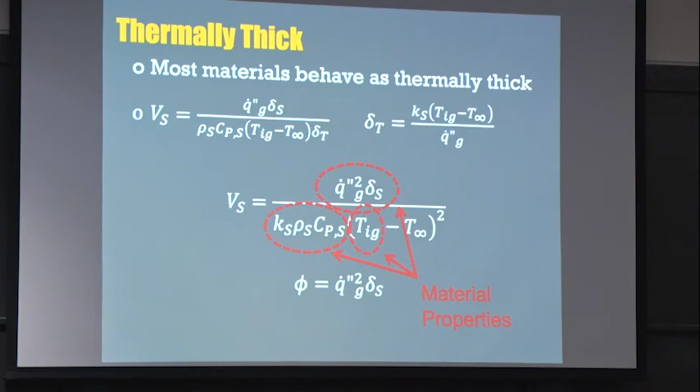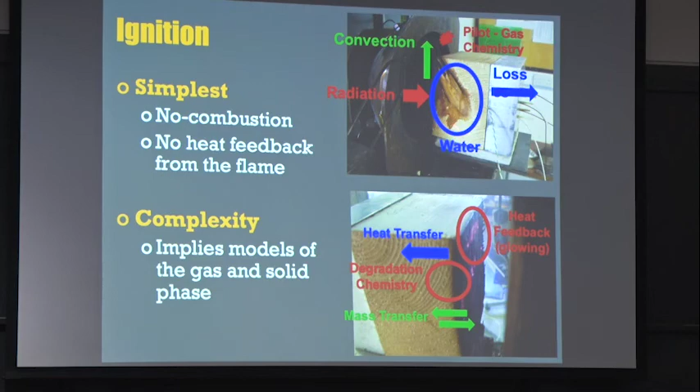So we're facing a problem of endless complexity. So here's a piece of wood, and the piece of wood is being heated by radiation. You're going to have convection, your film coefficient. You're going to have heat losses in the back. You're going to have water migrating. Normally the materials are heterogeneous, so you're going to have water concentration, for example, around the eye of the wood.

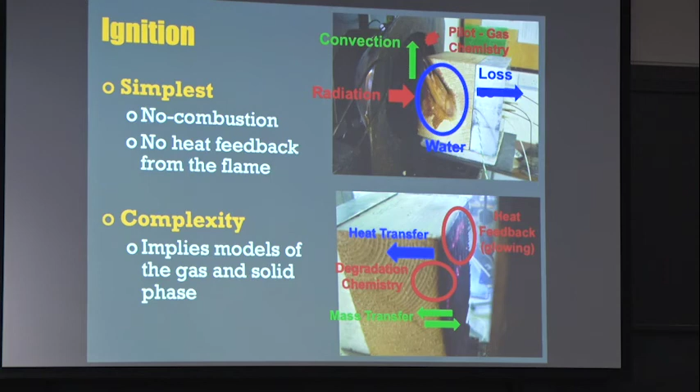And you're going to have different heat transfer and different mass transfer if you're against the grain or with the grain. You're going to have different chemical processes like glowing, for example, which is smoldering, and which is a solid phase combustion. So the problem in itself is incredibly complicated. And once again, we need to take a step back and start looking at this problem in a much more simplified manner. But we have to keep in mind exactly what we are assessing, so we cannot get lost in trying to figure out something that effectively becomes irrelevant.

So many times one of the problems that we tend to have with very complex problems is that we know what we can solve mathematically. And what we do is we transform the problem to fit the math as opposed to actually create a math to solve a problem. And that way we end up solving problems that are not existent, just simply because we can actually solve the math. Now, it looks very pretty in a paper, but it's absolutely and utterly useless because you're solving a problem that is unreal. And this is one of those situations where you actually have an enormous risk of landing in that path. And we have to be extremely careful.

Perfect example, one of my former associates, who is a professor now in Imperial, developed this model of pyrolysis within the solid. And they were trying to predict how the material was going to gasify, but because they couldn't get a proper reduced chemical kinetic mechanism, the way they actually do it is by using genetic algorithms. In other words, they were fitting in a very sophisticated way the data. So they started with one chemical reaction, they moved to 2, they went to 3, 4, 5, and they kept increasing the number of reactions, many parameters being involved. But of course, the genetic algorithms will always find you a number.

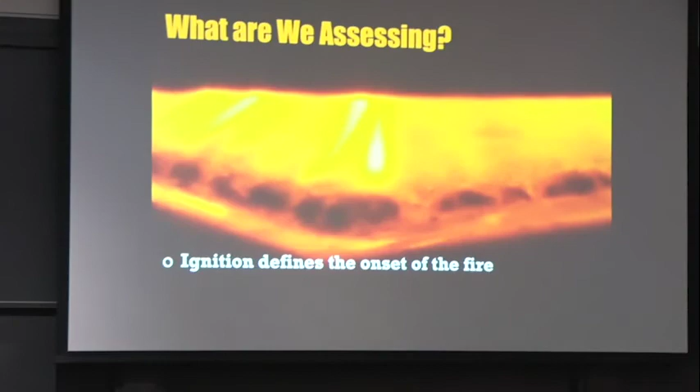Ignition is going to define the onset of the fire, and that's what we're interested in. We want to know when the fire starts. Now, the path that it follows is going to be very complex, and we have to be able to simplify it in a way that we can actually achieve the objective. So ignition is going to control flame spread, and therefore is going to control fire growth in the system. So we need to be careful.

Now, if we look at the problem in its complexity, that's the way it looks. So effectively, if I take a piece of wood and I start heating it up, it's going to start degrading, it's going to crack. So you're going to have an area of cracks. Basically, you're going to have areas where the material is going to be consumed, and you're going to get a porous environment being formed. So you have all those holes in here.

So the charring region, or this area that is degraded, is going to progress with a certain velocity. And that velocity is going to be preceded by a pyrolysis front, because there are multiple reactions that can actually happen in here. And there's going to be a thermal front that is going to be here, and there could also be an evaporation front at some point.

At the same time, oxygen can actually diffuse to the inside of the material, while fuel can actually migrate to the outside of the material. And in the process, they can react, and you can actually have oxidative reactions like glowing, for example. So you can have all sorts of things going on. You're going to have re-radiation coming out. So you can complicate this problem as much as you want.

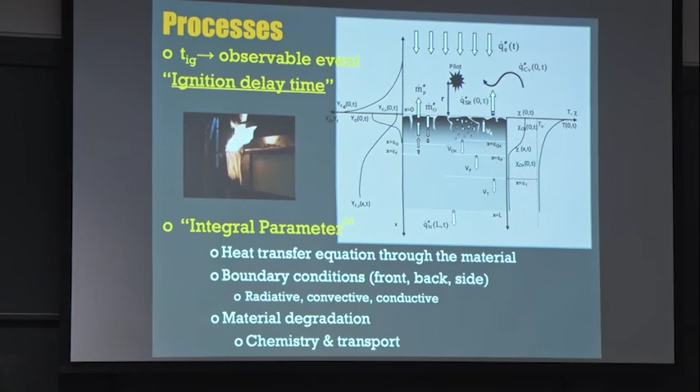Now, why the ignition delay time? It says it there. It's an observable event. So the magic of the ignition delay time is that if I start the process impulsively, in other words, I put a cold material in front of a radiant panel, I know when time equals 0. And then I can wait until all these processes happen, of which I cannot see any of them. I cannot measure any of them.

We don't have appropriate diagnostics to be able to actually measure, for example, the migration of fuel within a porous media. We cannot do that. None of these events are observable. But the one thing that I do know is that at some point it will ignite. And the ignition is something that I can see. So I can establish time 0, I can establish time to ignition, which effectively gives me an observable parameter, something that I can measure.

So the next thing is to try to create an equation that describes that observable parameter. So then by comparing my equation that calculates the ignition delay time with my measured ignition delay time, I can extract some of the parameters that I cannot measure. So in a way, what you're doing is an inverse model. You're taking something you can measure, and you are comparing it to an analytical formulation so that you can extract the parameters that you need.

So the simplest possible formulation that I can have is a one-dimensional heat transfer equation. So how do I get into a heat transfer equation that is one-dimensional? I'm going to make my sample big enough. I'm going to insulate it well enough so that at least in the observable area, I know I don't have gradients of temperatures in Y and Z, and I only have gradients of temperatures in X. So I'm creating an experiment that fits the model that is the most simple.

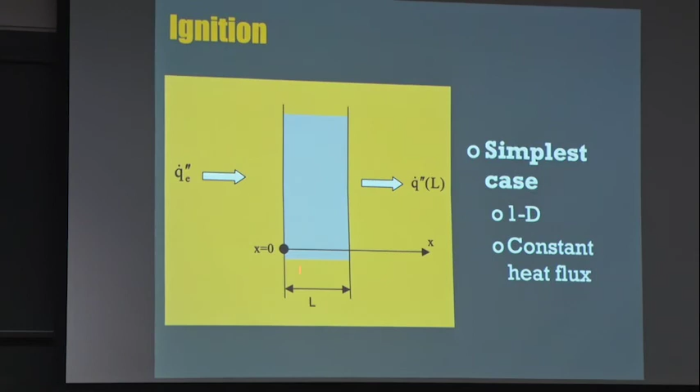Okay? So basically, I am going to try to make it as one-dimensional as possible with x equals 0 at the surface that is being heated and x equals L at the back surface. Now, to simplify the problem, I am not going to vary the heat flux. What I'm going to do is put a radiant panel with a well-characterized heat flux in front of it so that I'm putting a constant supply of heat into the system.

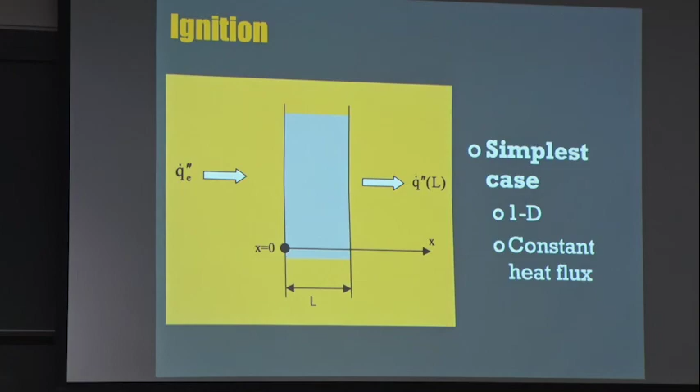At x equals 0, the heated surface, conduction into the solid at x equals 0 plus is equal to the energy absorbed by radiation minus the heat conducted back to the gas phase minus the surface re-radiation. Is that okay? So this is what is lost by re-radiation, this is what is absorbed, this is what is conducted. Okay? Now, I haven't put a convective heat transfer coefficient. I could actually put a convective heat transfer coefficient, but basically I'm doing conduction back through the gas phase at this point.

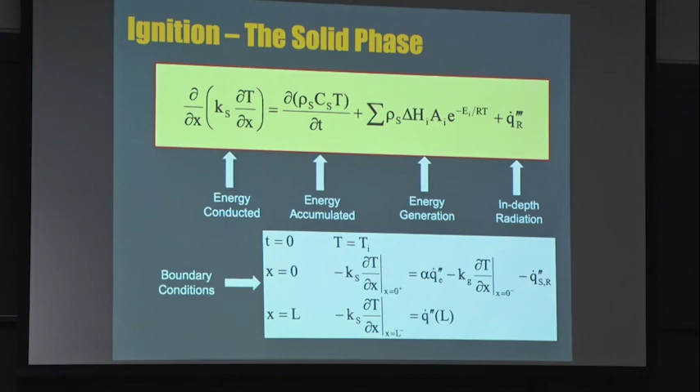So a heat sink, if you put a big block of aluminum in the back, by measuring the temperature of the aluminum, you can actually quantify the heat losses. Okay? Either way, it's the same, but effectively you're creating an experiment that is minimizing your error. Okay? So there you go. Now, the big problem is the fuel generation, because to be able to ignite, I need to produce fuel. So the key parameter that I want to obtain is the amount of fuel that is being generated. So the amount of fuel that is being generated is going to be given by this expression. Now, what does this expression mean?

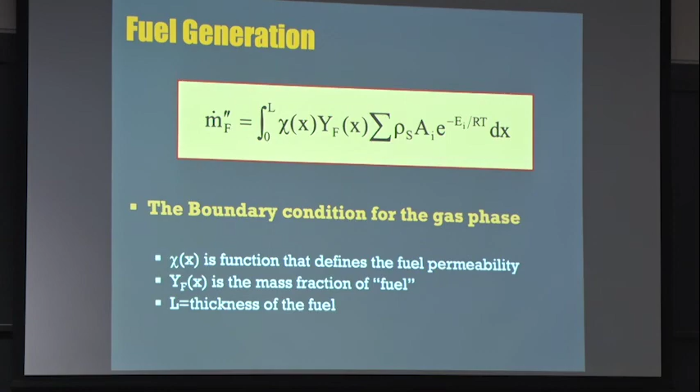So you're saying that if this is my solid, okay, and I have a gradient of temperature, I'm not going to assume ahead of time that I have a high activation energy. Okay? What I'm going to assume is that effectively you can produce fuel at every level because the reaction rate is some e to the minus E over RT. Okay? Okay, so if I have a reaction rate, then effectively it's a continuous function. So wherever I am, I will produce mass.

Okay? Now, obviously, if I have a very, very high activation energy, most of the mass will be concentrated at the surface. But if the activation energy is slightly lower, then effectively I'm going to produce mass in depth. Now, then if you look at what comes next, then you have this concentration, because effectively these reactions might not produce only fuel. Part of the fuel might be oxidized because you have diffusion going inside.

Okay? So this will be 100%, or a mass fraction of 1. Okay? So this is the amount of mass that is being produced by the chemical reaction. Part of it might be already fully oxidized. So if I have diffusion of oxygen coming in, not everything that comes out can be fuel. Part of it can actually be already CO2, for example, in which case it will not contribute to your ignition. It will be an inert. So effectively, only a fraction goes out, and that fraction is YF.

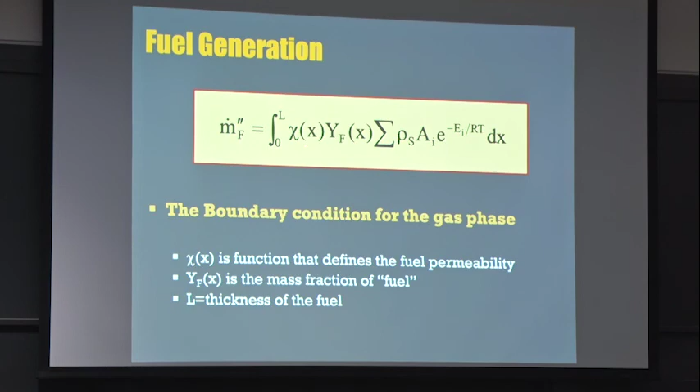So you have some other permeability or whatever function that reduces even further the amount of fuel that can come out. Is that okay? So at the end, the fuel that comes out is what is being generated, what is not oxidized, and what is not trapped. Is that clear? Okay? So the equation then becomes quite complicated because now you have all these different terms. And the problem is that I need to integrate over the entire depth of the material. This is the fraction that is not trapped. This is the fraction that is not oxidized, and these are all the chemical reactions that are producing the fuel.

Okay? And this is where you start getting lost. Because there's no way you can measure this properly. You could measure it at the outside, okay? But then a lot of things might have happened in between, but maybe this one can be quantified. This one is almost impossible to measure, and the chemical kinetics, eventually the sensitivity, the compensation, whatever, it can create a very, very significant problem, okay? So here we are now getting to the point where this becomes an intractable problem, no matter how simple we've tried to make it.

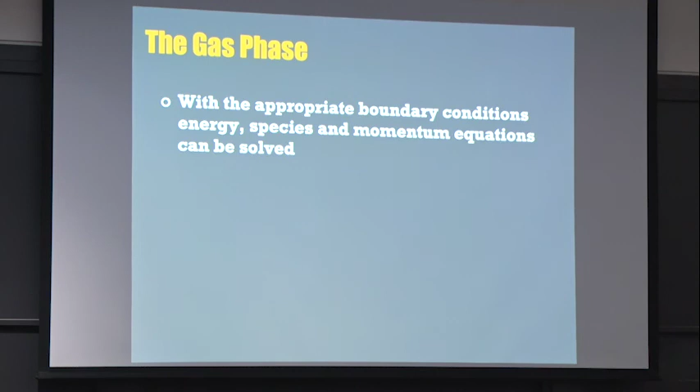So with the appropriate boundary conditions, I can try to solve this. And this is what people have been trying in these pyrolysis models. So when you look at ThermaKin, you look at Gpyro, all these pyrolysis models, what they're doing is effectively solving these equations here with these source terms. Is that okay? And they keep playing around with different forms of kinetics, different forms of oxidation, different potential permeabilities to try to find as close as possible a mass flux being generated by the fuel.

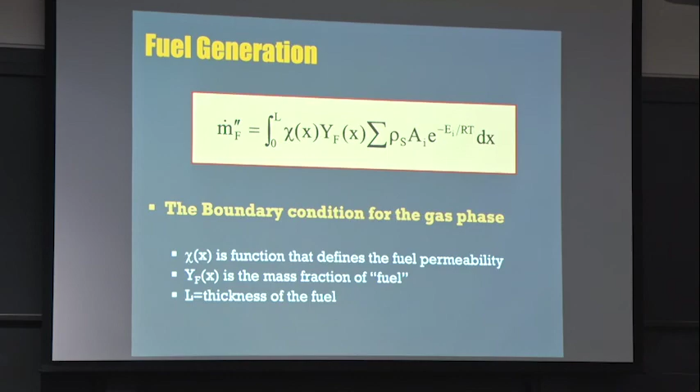Okay? Now, the two main codes right now are ThermaKin, that is Stoliarov in Maryland, and Gpyro, which is Lautenberger in California. So once again, East Coast versus West Coast. And so the two models are fundamentally identical, with the exception of a few nuances that are more the product of the perception that the researchers have. But effectively, they are desperately trying to create a mechanism to solve those equations. And then eventually, they're trying to bring fuel to the gas phase to try to create a combustion process.

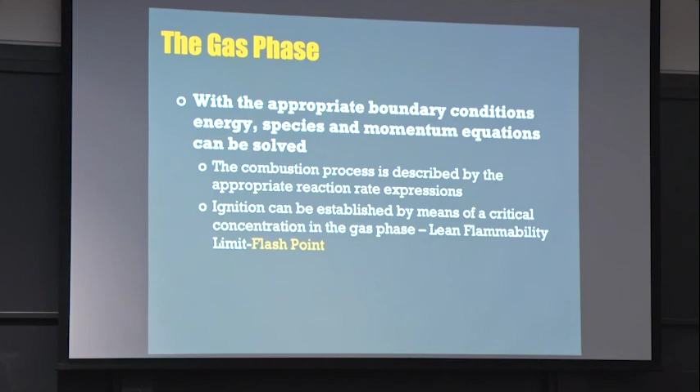And for example, a simplified version of Gpyro was introduced by Simo Hostikka in FDS. So the CFD model now, once you get the fuel coming out, it feeds a combustion reaction, which is really not a combustion reaction, but is purely a mixture fraction reaction where you don't have combustion, you just have mixing. Is that okay? And eventually ignition can be established by means of some sort of critical parameter. Now, this is important, because here there's a big confusion between the flash point and the fire point.

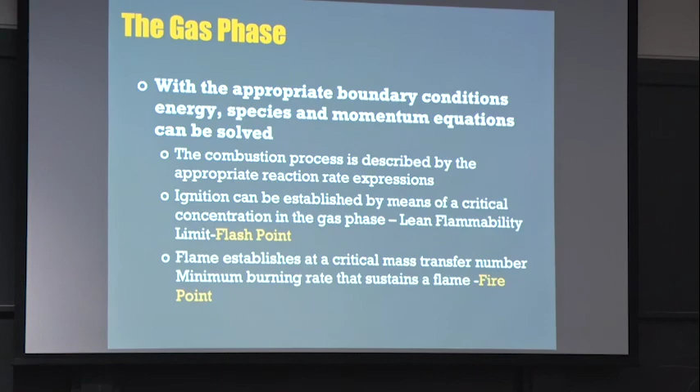Okay? So, can anybody explain to me what is the difference between the fire point and the flash point? I mean, the definitions are there, but what is conceptually the difference? Yeah. Difference between a local energy balance and a global energy balance. So your local energy balance would be when you have ignition, which would be your flash point, and then your fire point is when you can actually sustain a fire that moves throughout space. You are fundamentally right, okay? But it doesn't help explaining what the problem is.

You were going to say something? Yeah, but I think he said that one of them was a sustained flame and the other one was just there for a short while. Okay, so that's a physical manifestation. Yeah. So the flash point is a flash, and it cannot stay. That's associated to a global energy balance because effectively it cannot produce enough fuel so that the flame can remain in place.

Is that okay? So in a way, the fire point, yes, is you have attained a certain global condition that enables the flame to sustain and remain established. Okay? Now that's a manifestation. While in the case of the flash, you have not attained that global energy balance, but nevertheless you're within the flammability limits. So if you ignite, you can flash. There will be a flame, but that flame cannot maintain itself, because the global energy balance is not appropriate.

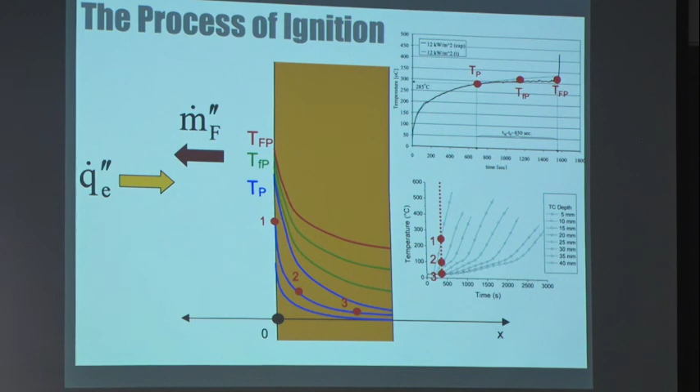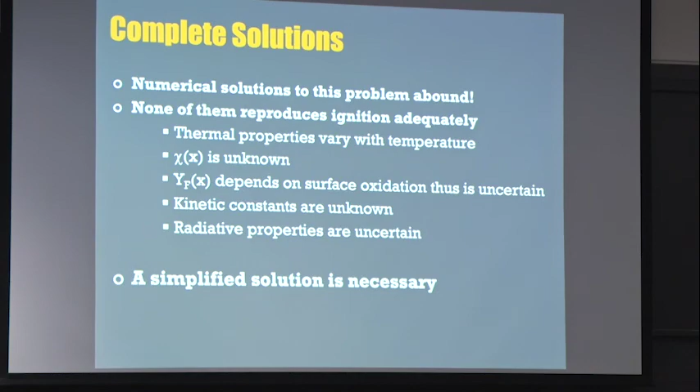Okay? So I have three phenomena. One is the onset of pyrolysis, the other one is when I have enough fuel to get a flammable mixture or get an ignition, and one when I have enough fuel to avoid extinction. In other words, the flame is going to remain. Okay? So, all these numerical solutions, as I said, are there, but we're going to try to simplify them because many of these parameters cannot be modeled correctly.

So, how does Quintiere simplify the problem? So basically what he says is, okay, my time to ignition is going to be my time to attain pyrolysis. Once I attain pyrolysis, I start producing a flammable mixture, and that flammable mixture eventually will reach the flash point. And that is what he calls the mixing time. Okay? Then he says there is a final time, which is the induction time, which is the jump from the flash point to the fire point, which is effectively when you get a flame that is fully established. Okay? So the three times effectively correspond to the total ignition delay time.

Now, he is going to conclude that the time to reach pyrolysis is so much greater than the mixing time and so much greater than the induction time that he can neglect these two and effectively say that the time to ignition is equal to the time to pyrolysis. Yes? Which is also, I guess, conservative in the context of fire safety. Of course, because it ignites faster than what it should be. Is that okay?

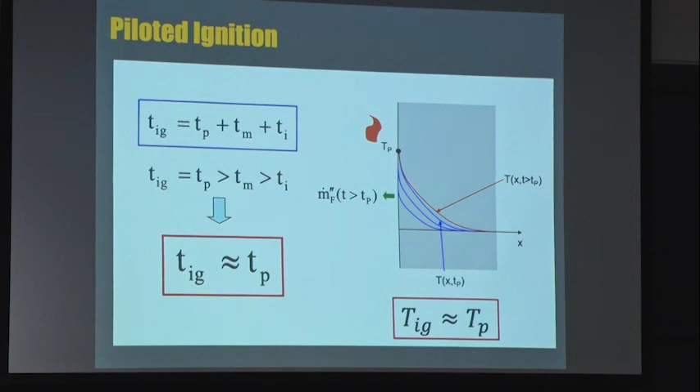So, in a similar manner, the temperature of pyrolysis, which is not a measurable quantity, now becomes the temperature of ignition, which is an observable quantity. Okay? So basically, I've simplified the problem, and by doing that, what he is assuming is that the period he's interested in is purely the period where the material is fully inert. So if it has not reached pyrolysis at the surface, it would have not reached pyrolysis anywhere else. Okay?

So, what happens with my equation then? If I look at my equation, then this term disappears because it's inert. Is that okay? He's going to make the assumption that most fire materials are opaque, so there's no in-depth absorption of radiation. Okay, that goes away.

Then he's going to make it semi-infinite, in other words, thermally thick, and it's so thick that effectively you can assume that your back boundary is infinitely far away. The thermal wave doesn't get to the end of the material before it ignites. Okay? So the boundary condition that was at x equals L now is at x equals infinity, and it's basically T equals T ambient or a gradient equal to 0. Either way will work. Okay?

So then he will say, well, this is too complicated. Let's just make it simple. He linearizes the heat transfer coefficient by adding convection and radiation into a single heat transfer coefficient. So conduction then becomes equal to a total heat transfer coefficient at the surface. Okay? Yes? Why wouldn't you use a radiation boundary condition? Because then the mathematics don't work. You cannot get an analytical solution. That's it. Okay? Like you're going to end up with a nonlinear...

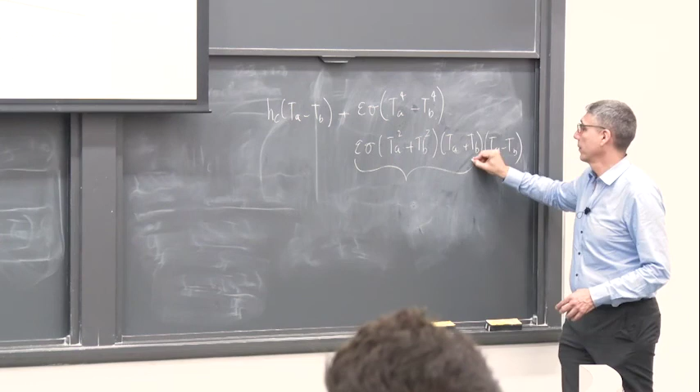Yeah, so the problem is that if you take the two terms, you're going to have convective TA minus TB, plus radiation, which would be emissivity sigma TA to the fourth minus TB to the fourth, okay? Then this term is nonlinear, so it completely complicates the Laplace transform that you're going to do to solve that equation, and it just doesn't work. So what he does is he says, well, you get epsilon sigma, he breaks this down into TA squared plus TB squared, TA plus TB, and here is TA minus TB, and he says that all this is an HT, okay?

Okay, so there's been a sequel of 100 papers of people trying to prove that right or prove that wrong, and the reality is that actually, if you pick the right number, it works. Because effectively, if you think about it, the temperature rises very rapidly and then more or less remains almost constant. So assuming that, at least for this part of the equation, these ones are more or less constant is not such a bad approximation. It's just the way it works. But there's no fundamental reason for that.

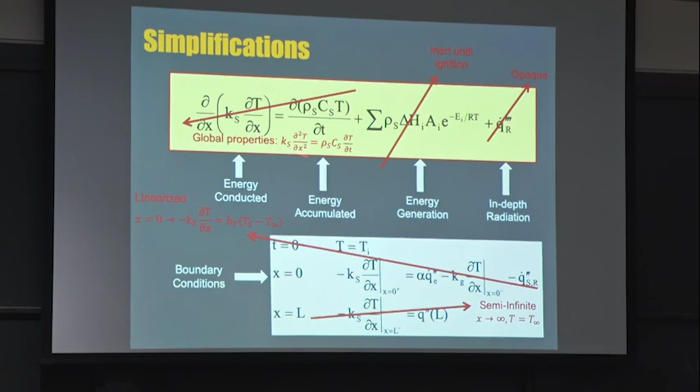Okay. So anyway, you simplify that, and then you assume global properties. So you're not going to solve for the temperature-dependent properties, so you can take them out of the differential equation, which effectively gives you this very simple semi-infinite solid equation to solve. So the simplified problem then becomes this. This is your initial condition. This is your boundary condition at the heated surface. And this becomes your boundary condition at the back surface.

So effectively, if you do a Laplace transform of that, you can get the solution to the equation, and then you simplify it for high heat fluxes and do a Fourier series expansion, and you get a very simple expression, which is that. So the solution to the math is a Laplace transform followed by a Fourier series expansion, but the expansion has to be for times that are very short, in other words, when the heat flux is fairly significant. There's a different solution for heat fluxes that are low. That will be the same Fourier series expansion, but for a long time. Okay?

But let me just use the one for the short time. Okay? So what can I see here then? So what you can see here is effectively the observable event, the time to ignition, the thermal inertia, the ignition temperature, and the externally supplied heat flux. Okay? So you're going to supply a heat flux externally.

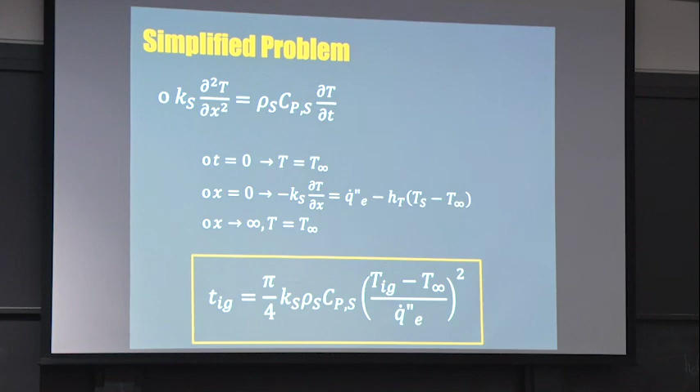That heat flux is going to be put impulsively, and then you're going to establish how long does it take to ignite. And by collecting data on these terms, you're going to extract the thermal inertia and the ignition temperature. Okay? So the material properties become the thermal inertia and the ignition temperature. The inputs are the external heat flux. The observable event is the time to ignition. And obviously the ambient temperature, you will measure it.

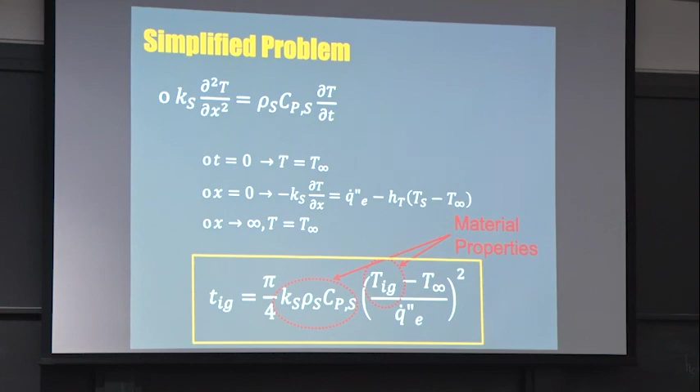Okay? So that gives me the ignition, but I still need to be able to work the flame spread out. But at least I'm going in the right direction. So the final one is the burning rate. And in the last hour, I'm going to go back and revisit all this the way the test was created. What I did here is I just gave you the equation that gives me the information on ignition, so I can find these parameters, so that then I can plug that into my flame spread equation, and with that I can get the flame spread. But I haven't done it yet.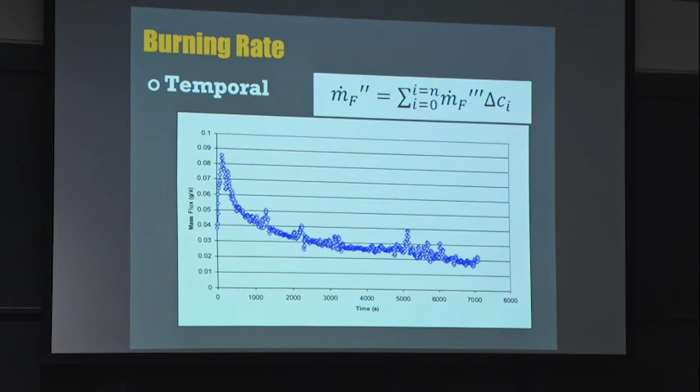Okay, the final one is the burning rate, and the burning rate generally follows a form like this. So this is a charring material. So effectively the material ignites, and then it has a very high burning rate at the beginning, but eventually starts decaying as the char gets thicker and thicker until it reaches some form of a steady state or it dies. And that is a very difficult thing to measure. So basically the way it's done is what people call the cone calorimeter.

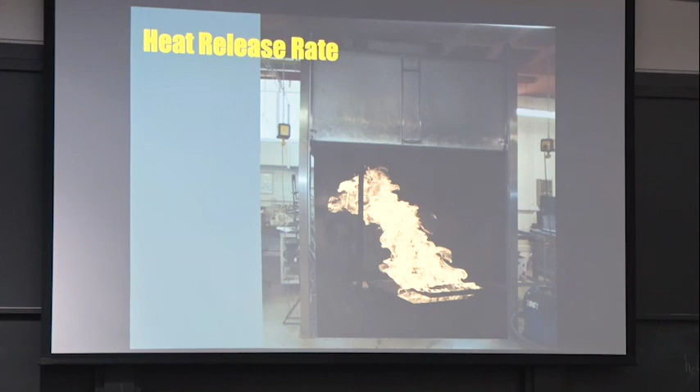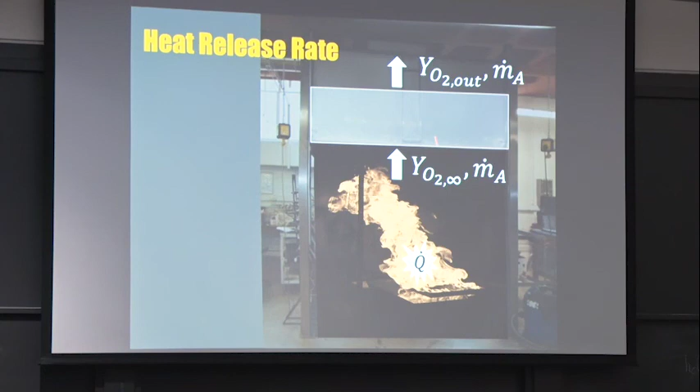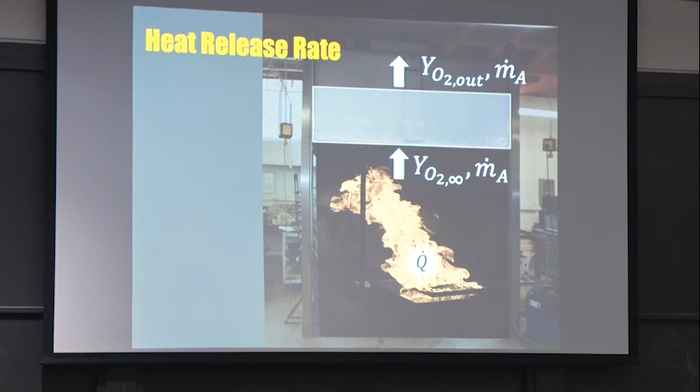So what you do is basically take the heat release rate. You're going to get the same smoke layer as we did before. We're going to measure the amount of air that comes in, which is the same as it comes out. But here it comes in with ambient oxygen, but it leaves with the products of combustion. So effectively you can calculate how much oxygen you have consumed. So this is oxygen in, this is oxygen out. If you subtract the two, you get the consumption of oxygen. And then if you multiply by the heat of combustion per kilogram of oxygen, you get the heat release rate. So effectively your heat release rate becomes your heat of combustion per kilogram of oxygen times the mass of oxygen consumed.

Yes? Sorry, is your mass of gas flow remaining constant the whole time, even when you have your oxygen reacting? Yes, because I'm controlling the fan. Okay. So you control the fan, so you know how much mass you're moving through. And so effectively this is measured. This is measured. Well, this is ambient. And these two have to be the same, conservation of mass. So effectively, that's what you get.

So now, if I take this heat release rate that I have calculated, and I make it equal to the heat of combustion according to my table, and I divide by this, then I get the burning rate. Is that okay? Yep. So, heat of combustion, complete combustion per kilogram of oxygen is 13.1, and that's the term that you're going to be using, which effectively gives me the final parameter. Is that okay? Yep. So I can go then back to my equation. Now I have the three of them, and my problem is in principle solved.

So the final hour, what I'm going to do is basically create the experiment. That effectively is going to give me all the numbers, so I know what the theory is, I know what the assumptions I made, I know more or less what the parameters that I'm looking for. So what I'm going to try to do is basically create the experiment that gives me all that information. And that is basically due to Quintiere. So Quintiere created the experiment for that.

So again, let's take about maybe 5 minutes, and I am going to grab a coffee, so I'm not answering questions during the break. And so let's break for about 5 minutes.